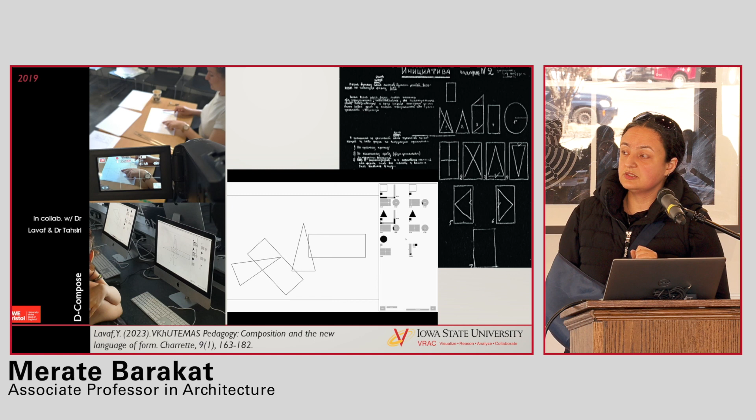Obviously, this was manual, and my colleague, Dr. Lavaf, has been running first year, which is 230 students every year, and has been doing that manually. And so we thought, what is the difference between them learning it by hand and if you run the same sort of exercise on the computer?

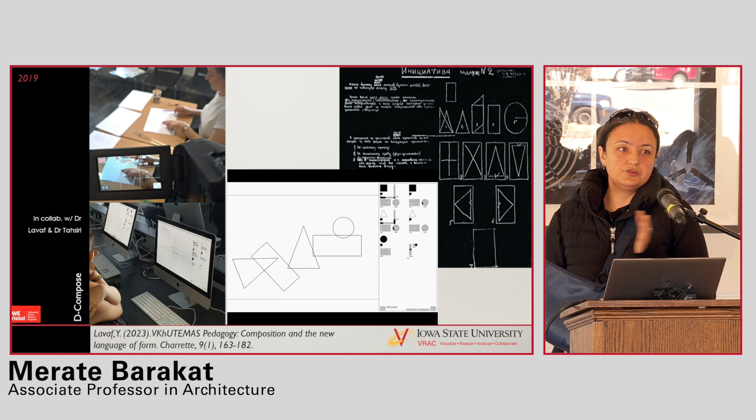And because we have all this data, we are now working on, instead of just having the students run their examples and then give it to someone to grade, how can we train a machine to actually indicate to the student, while they're doing it, that they are too far from a good composition, or getting closer, or getting some sort of feedback, essentially.

So this part, as an architect, the buildings we know are starting to get smarter, we're getting these sensors, but the idea is, how can this building have a dialogue with its users?

So my colleague who has been working with me, he's a phenomenologist, does not do any technology, but he has the sense of how do we be? How are we being in the space? How do we be as a community? How are we on our own if we're one or two people?

At the same time, I was trying to figure out how people navigate a space collectively in response to sound. So we set up an installation in a crypt in Bristol, with a simple set of sensors, and the system figures out: if you have one person, there is an ideal position. The user doesn't know that, but as they're moving, their speakers are moving from pink noise to an actual music composition.

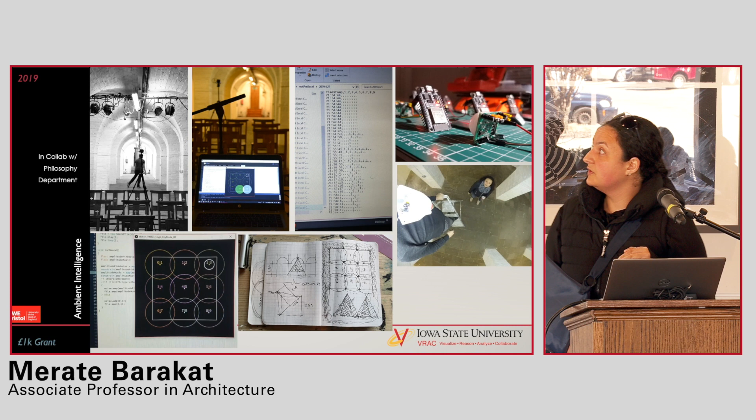If there's two people, then the system starts encouraging them to find the positions that will help them both work together. And if there's three or more, then they start navigating the space.

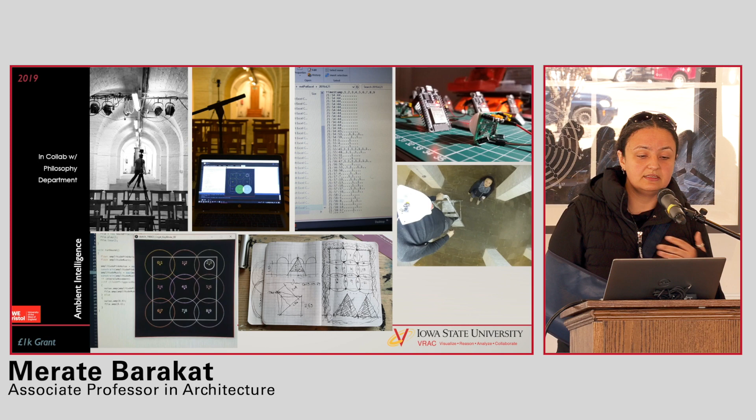So the idea was, from my perspective, I was trying to figure out how people will navigate the space. And in his example, he was trying to figure out the phenomenological response to these changing aural senses.

And so the music that we used is my colleague's friend's. He let us borrow it. After 2 days of the exhibition, it was a bit nauseating, but it's a beautiful piece.

So one of the things that we didn't realize is that if there was a group of people that knew each other, they started negotiating, but the ones that didn't know each other were not aware that there's a way of collaborating together.

The other thing, which comes from the recording but also in the experience itself, is that pink noise, or noise in general, masks voice. So it was very difficult for people to communicate because the pink noise was masking them. And as we were recording, because we were using a fancy GoPro, it was canceling out the noise, and therefore the recording is not showing the change in the music.

We then took that project to our MArch students and brought in a fabrication method. So instead of music, we were trying to figure out how to fabricate sound. Each student found a different perspective on the project.

One was looking at a phenomenological response of how you can allow or move people through space just by binaural cues, without telling them where the corridor in the space is.

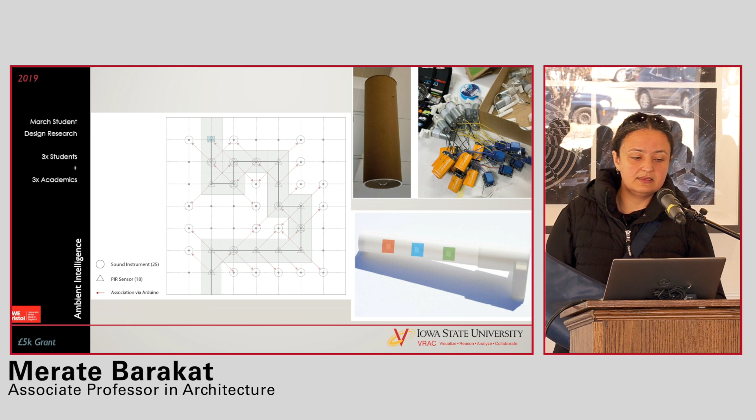The other one fabricated essentially 3 different tones that an air compressor was passing through in response to the location of the person in the space, trying to navigate them, and then trying to see how people would react to the sound. So they put chalk on the floor and encouraged people to fill their shoes with chalk and try to follow the space.

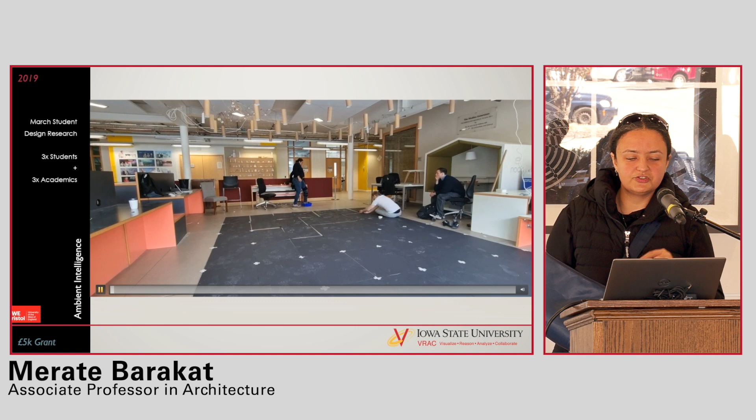So these are the simple small bits of the project. I don't know how much they are computer response, but that's how I kind of see the technologies—what does it mean? How do people comprehend the sound, the music, or even the images, and what is the quality, and what is the importance of the quality of that?

Should start wrapping up. I'm done. Okay.

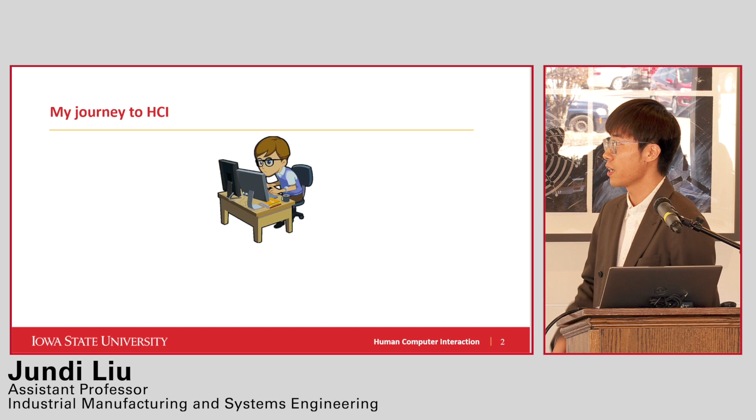I'd like to take you through my journey to HCI. Everything starts for me as an undergrad in computer science. I was coding all night long. That's how I learned and gained experience with the computer part of human-computer interaction.

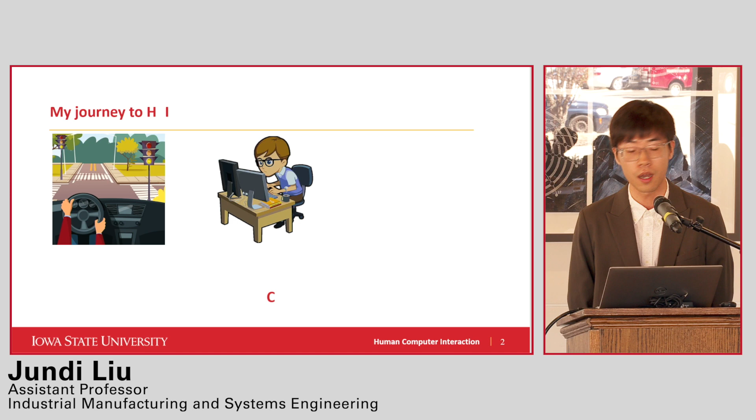Then I took a bit of a switch in grad school, entering human factors and ergonomics research in industrial engineering. Several of my projects involved naturalistic driving dataset analysis, where we analyzed human behavior, driving safety, crashes, and human errors. That's how I gained experience in the human side.

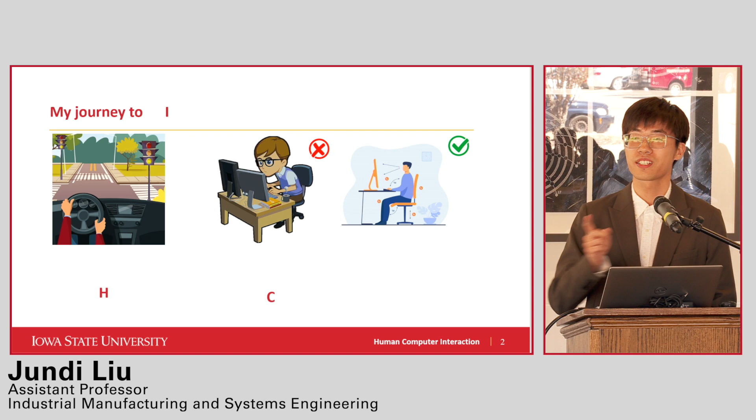One of the biggest findings of my entire research area is really good, bad posture. Correct your posture as soon as possible, okay? That's really good for your health. Okay, that's a little joke.

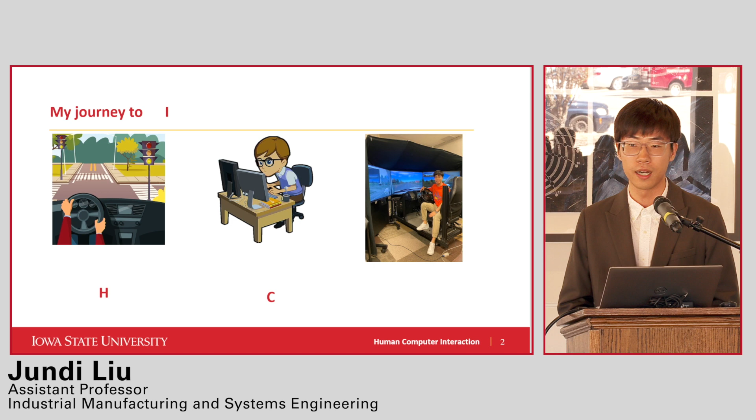For my dissertation onwards, I wanted to combine those things together—that's the interaction part. I started working on driving simulators so we can program autonomous vehicles' behavior, and also see how human drivers behave and how to connect those together.

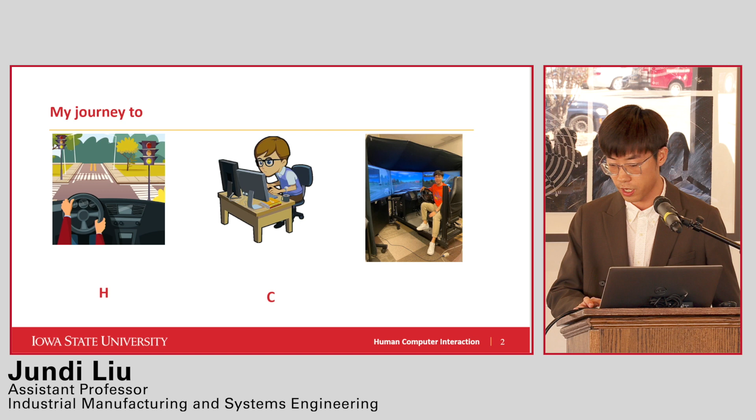All of this leads to my current lab, called the Human-Centered Interactive Autonomy Lab. Our goal is to build customized AI agents that can collaborate as trustworthy teammates with human users in safety-critical, complex decision-making tasks.

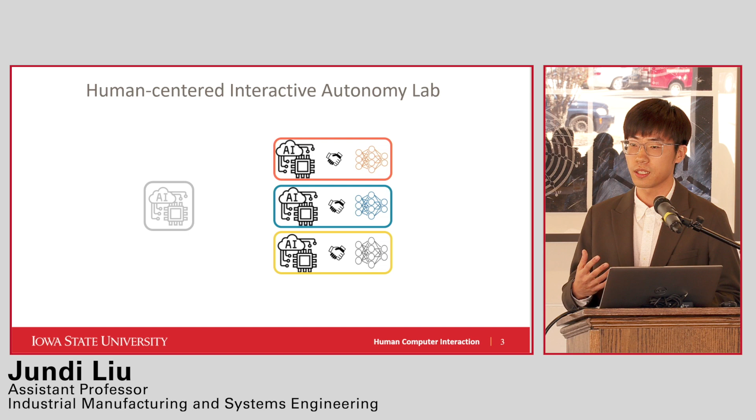Specifically, we want to build theory-driven computational human models that can collaborate with computers without intruding or interrupting during the interaction or collaboration. I'd like to break it down into three keywords in that name.

For the human-centered part, a lot of other studies treat humans as a data generator. What we want to do is build theory-driven human models. One of the human models we're looking at is the inverse reinforcement learning framework.

You interact with the environment by observing the state and doing some actions to receive a reward. In this case, you observe the expert's demonstration and learn those behaviors.

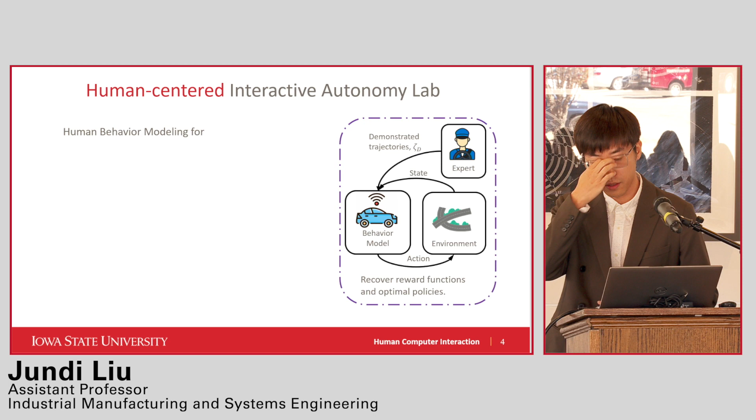We can use this human behavior modeling to build customized vehicle automation. This is one example where I learned this behavior model from naturalistic driving data and implemented it in a driving simulator with aggressive and conservative behaviors. We can also predict takeover readiness or timeliness in autonomous driving.

More recently, we started a new collaboration with the University of Nebraska Medical Center to look at how we can model older drivers' behavior with mild cognitive impairment, so we can build proactive monitoring systems for the driver and do some early intervention.

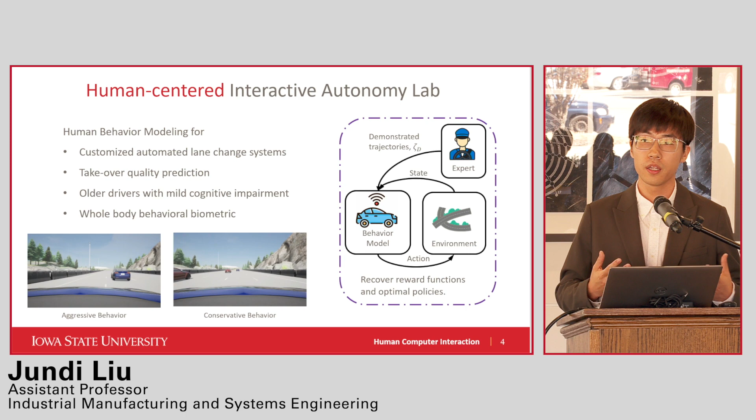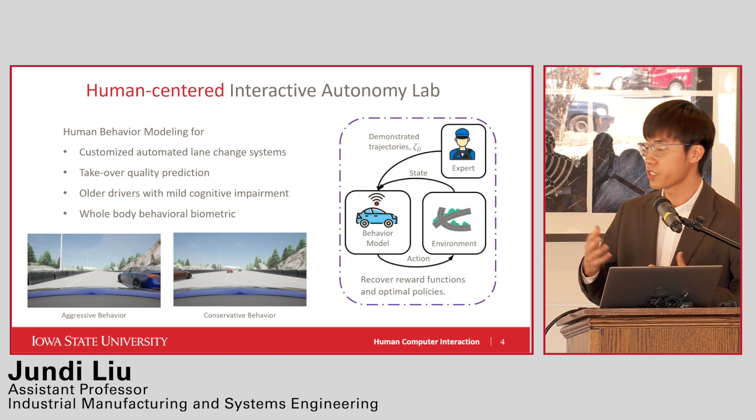Another recent project looks at whole body behavioral biometrics to see how we can improve authentication and human-computer interaction trust, as well as VR security—in the virtual reality world for human-robot interaction.

That's the behavior side, but humans have individual differences—none of us drive exactly the same. Mathematically, you should stay in the middle of the lane, but nobody drives exactly in the middle of the lane. So why does that happen?

Because we have different cognition—that's also the human factors side of thinking. We need human mental models. I'm specifically interested in human trust toward algorithms, robots, or systems.

We build driving simulator studies with different conditions, for example different transparency—overlaying information on the windshield to help drivers gain better situational awareness. Then we can induce different dynamics in their trust levels.

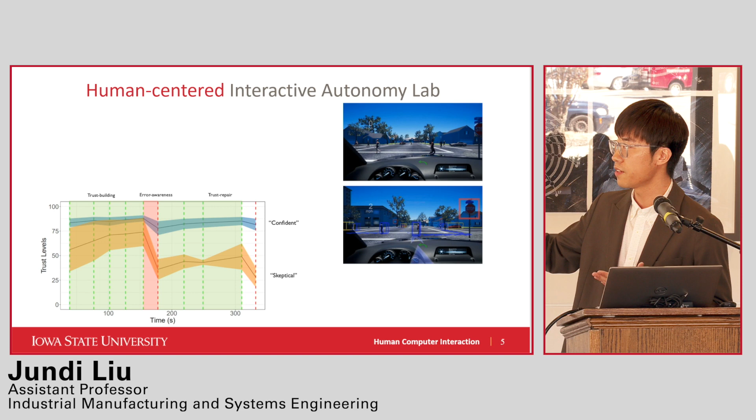We use machine learning algorithms to cluster different people based on their trust toward automation. Somebody in that blue group is pretty confident about autonomous vehicles—they tend to have a high trust level and stay stable even in faulty operations. But some other people are more skeptical.

In this case, we also want to build non-traditional machine learning algorithms—more theoretical-driven models. We use a state space model so you can model the current trust level depending on the previous timestamp's trust level, and also observe some system input.

Those are just hidden cognitive states. What you can only observe from the system in that model is human behavior—either their takeover intent or their driving behavior.

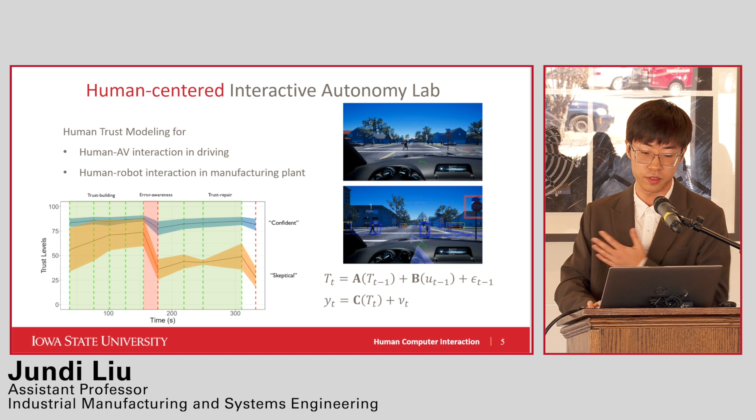So they can be used in our human autonomous vehicles interaction, and we recently explored human-robot interaction in the manufacturing plant. Okay, move to the next keyword: interactive.

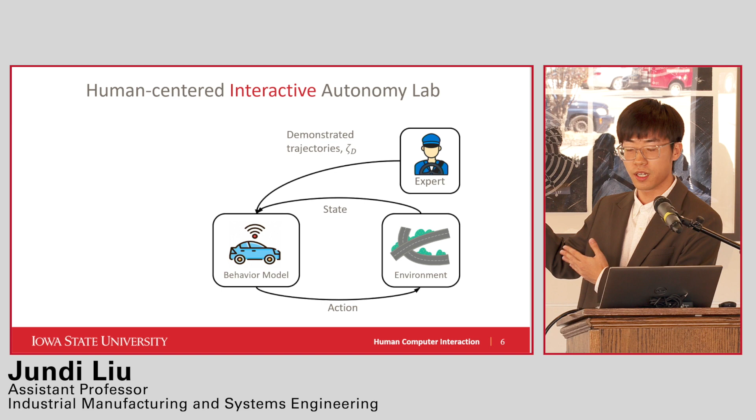For the interaction part, we have the theory-driven human-in-the-loop reinforcement learning algorithm we're trying to build and keep refining, starting from this human behavior model. We try to integrate human trust models into this framework so that when you make decisions, you're not only following the single mathematically optimal solution, like staying in the middle of the lane. You can have some suboptimal actions based on your trust. Okay, that's what this flowchart is saying.

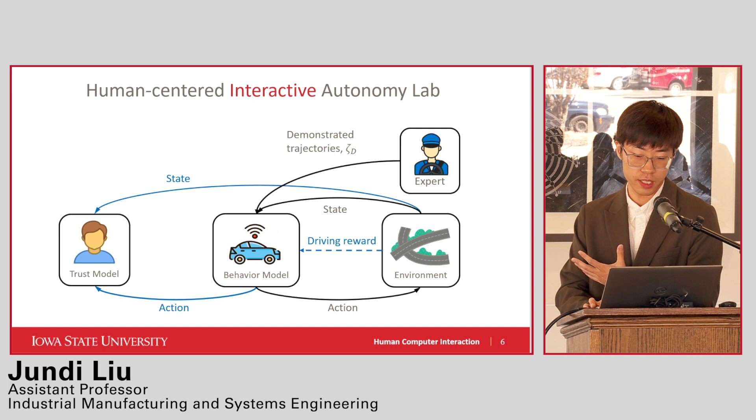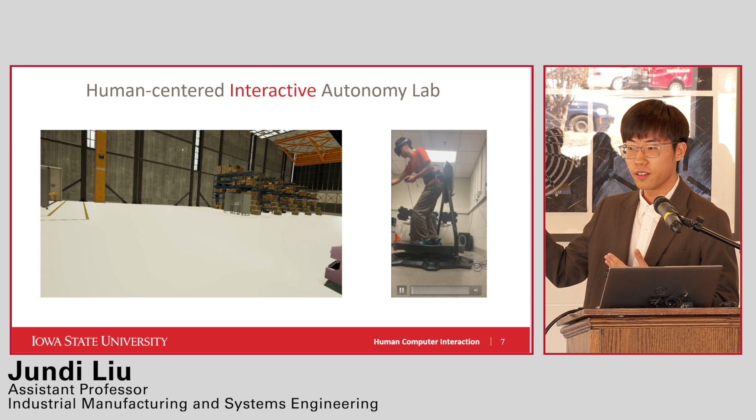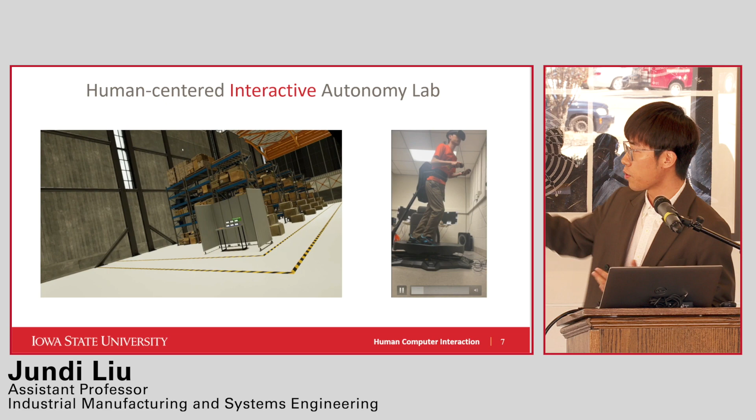And then we have some interactive test beds. We're trying to collect data and validate our methods. On the left here, we have a simulated manufacturing environment in a VR setting. We also have a very cool pedestrian simulator that you can walk in. Instead of teleportation in the VR world, you can actually walk and pick up stuff like in here. So this is our environment, and we have some design tasks for them to do.

And we also have a driving simulator, which is a multiplayer platform that will connect the pedestrian simulator with the driving simulator. So you will have this two-angle view, and then you can view each other's behavior. And yeah, we can do studies for vulnerable road users.

Okay, last one: autonomy. So our lab does research on autonomous cars, automated guided vehicles, and more recently, we started to look at humanoid robots and quadrupeds, like robotic dogs, and how they interact with humans.

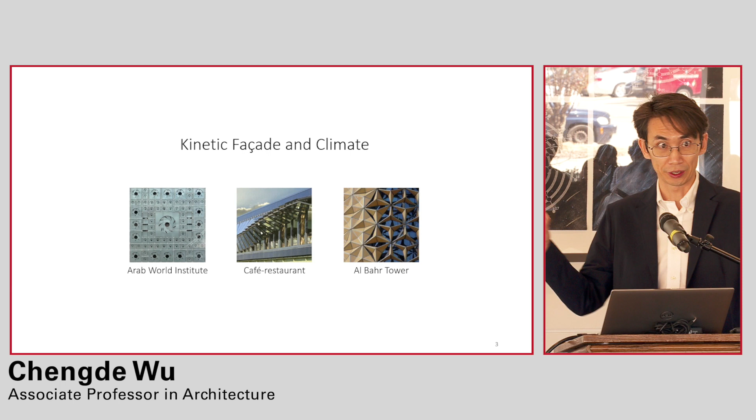One is kinetic facade, the other is micro-LED facade, and 3D printing that's right outside of the communications building. The first one is kinetic facade. Mostly our buildings are static, though there are a couple of buildings—sporadic examples around the world—that move. I was interested in how kinetic facade affects energy consumption and human visual comfort in terms of daylight and things like that, depending on which climate you are in, because depending on where you are, the solar angles are all different.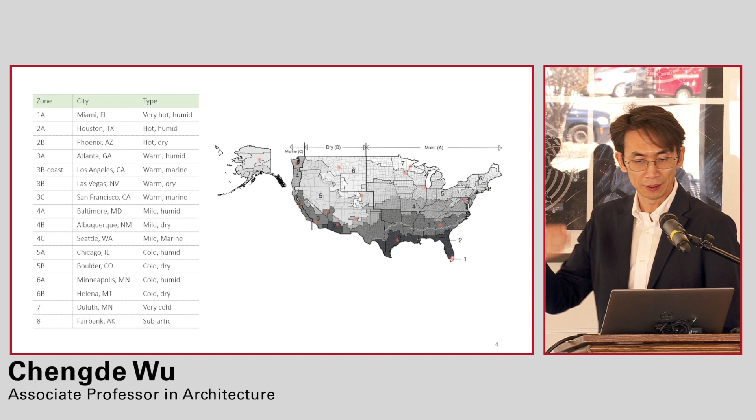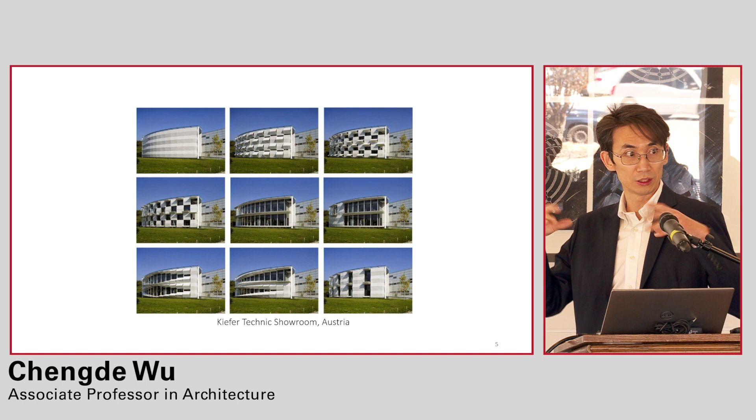So I selected 16 sites in the United States across different regions and ran about 3,360 simulations and tried to present the result of it. This is one example, which is a Kiefer Technic showroom in Austria. During the day, the facade moves according to the climate elements, and at night, it acts as an installation art piece, so it can be interactive with the people.

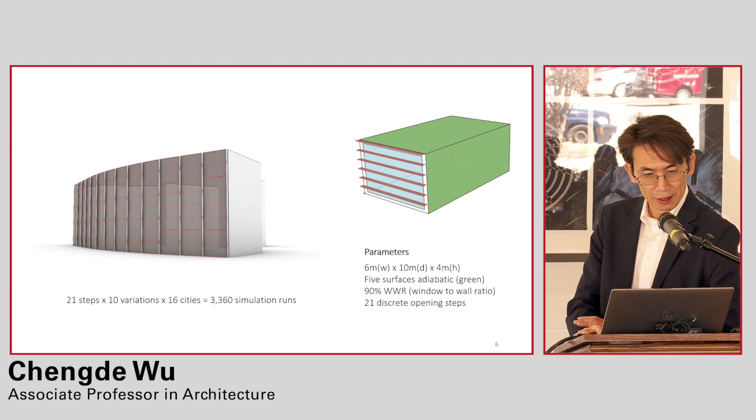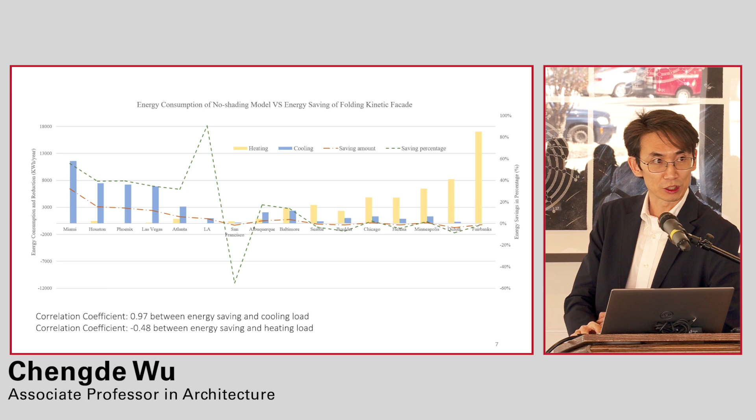Here is a model built in Rhino, a 3D modeling, digital modeling environment, trying to simulate what is the best angle to preserve energy and things like that. So after about 3,360 simulations, I got the result, which is not such an interesting bar chart, but the results are: typically it works better for hot climates. That is part of the result.

And there are some surprises, even boring numbers, but in the result I found some erratic findings that were not what I expected.

So the next step I went to was looking at different ways of kinetic facade—you can have folding, sliding, turning, all that stuff—and how that would affect broader regions. I picked 2,500 cities globally to map it more densely and ran about 1 million simulations last summer. It took 2 months of my computer running 24/7, and I got about tens of gigabytes of data waiting for me to process right now. So that's where it is.

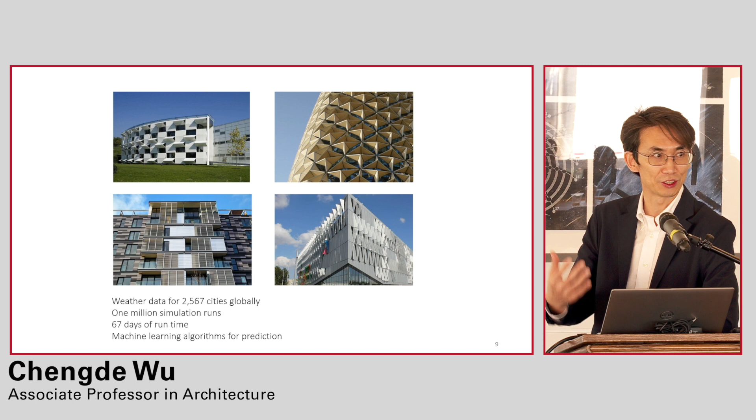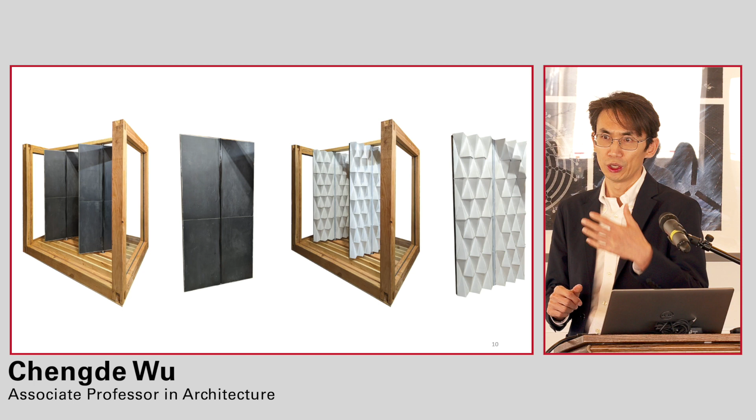On the other hand, I'm working with a couple of undergrad students and two grad students on building the actual physical prototype, trying to use microcontroller sensors to control that and see how it works. At some point, we'll try to test how that affects the energy and also the visual comfort of people staying in the room. So that's mostly where the progress is on this project.

At some point, all the sensor data can be connected to the cloud, and then people can use their phone to access the cloud platform and report their comfort level, and the facade can react to what the people inside the room are thinking.

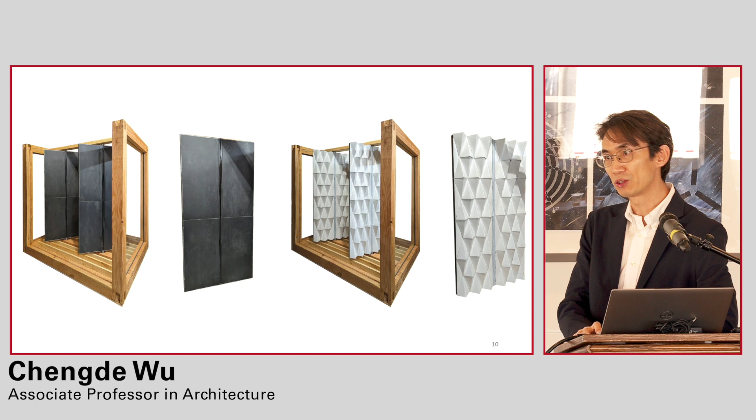And depending on how many people are inside the room, the temperature could change, and carbon dioxide level could change. You might need more ventilation. All that stuff, the system will respond to the user's comfort.

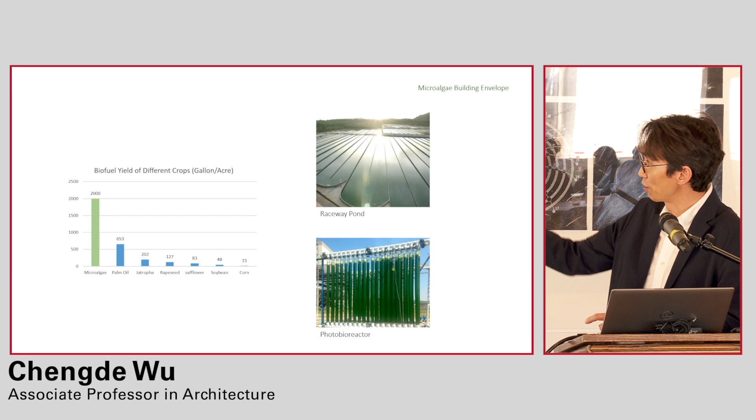Next project is about a micro-algae building. This is unique in the sense that we try to apply renewable energy on building facades. We do a lot of solar, wind, and geothermal in buildings, and there are a lot of examples of that, but biofuel for buildings is not very common. One common way we grow microalgae is in an open pond or in closed photobioreactors, and we're thinking how to use those kinds of photobioreactors on buildings to generate on-site renewable energy.

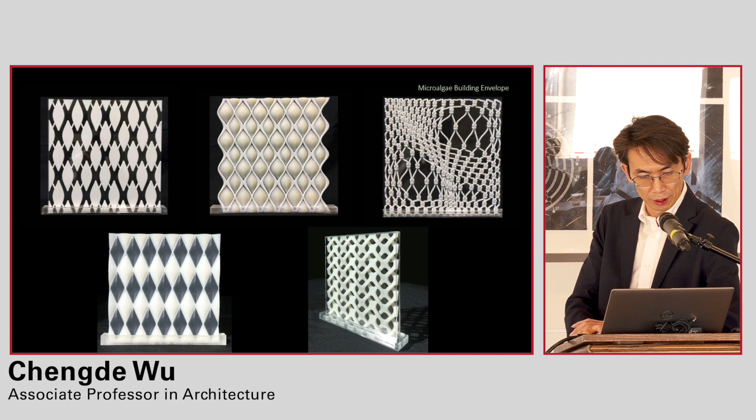We started small, like a foot-by-foot mock-up, just using 3D printing, just to see how they look in terms of different design prototypes. And we started to imagine what this could look like in a real building, how the system would work.

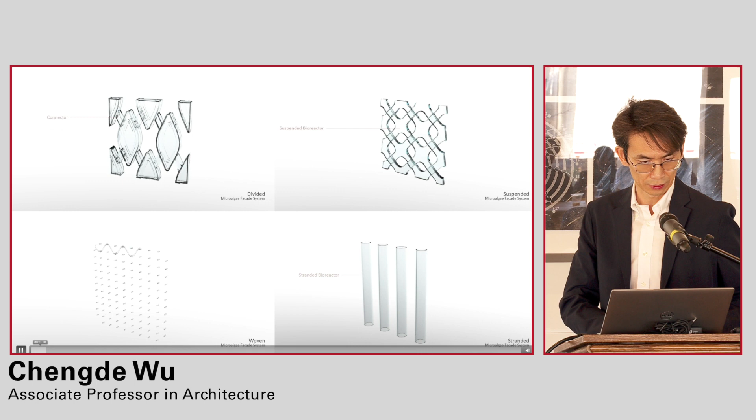I'll just quickly go through that. Can I drag it? Looks like it doesn't like dragging. It takes about a minute, I'm going to skip that.

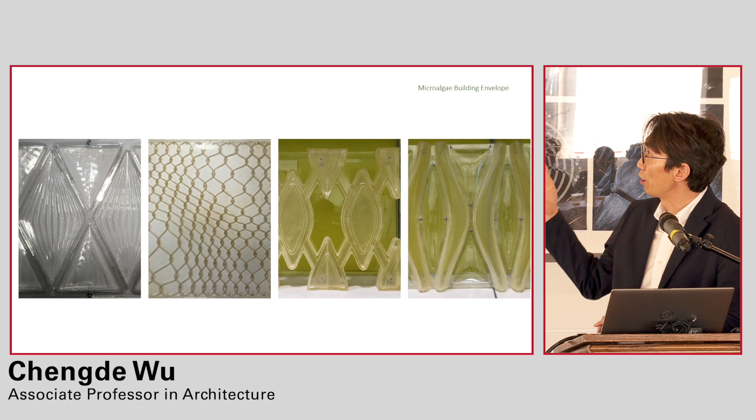Later we built a slightly larger 2x2 feet mock-up. It's a little bit functioning, so it's empty inside, so we can hold the microalgae and water inside. One of these is a smaller tubular algae setup, with algae living inside tubes with water and nutrients, and carbon dioxide feeding into that. From the top it outputs oxygen through photosynthesis, and on top a computer is monitoring the carbon dioxide and oxygen levels.

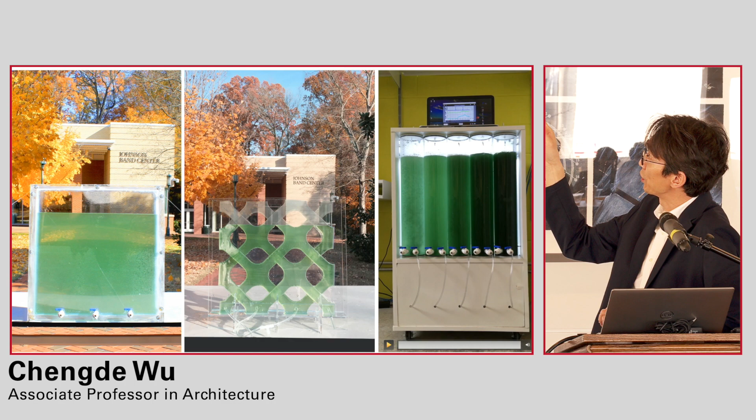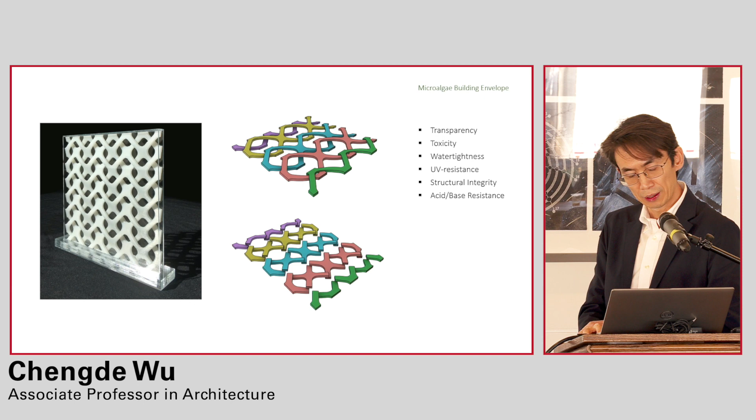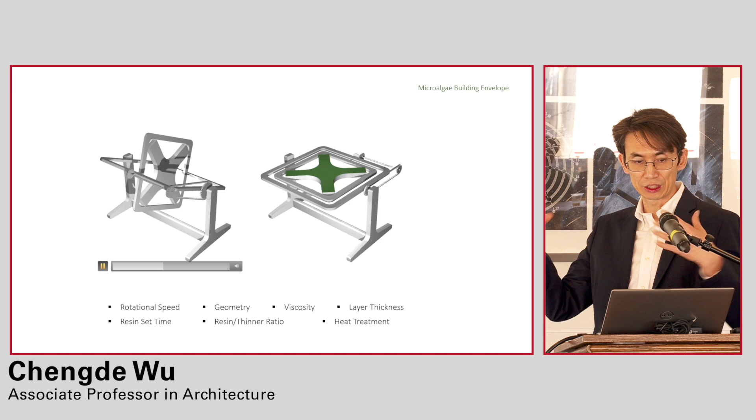Later we decided to go with dual-axis roto casting, which means the egg shape is one of the small modules, and it's empty inside. We put liquid resin in it, and as it turns, it coats the interior surface to make a hollow shell. Typical things like plastic kayaks are made with this roto-casting technique.

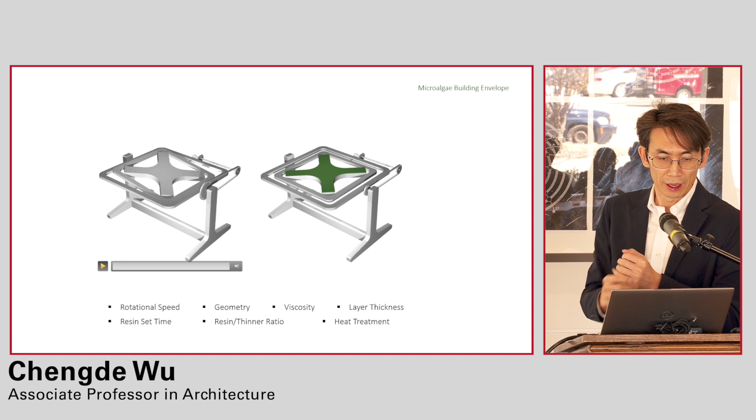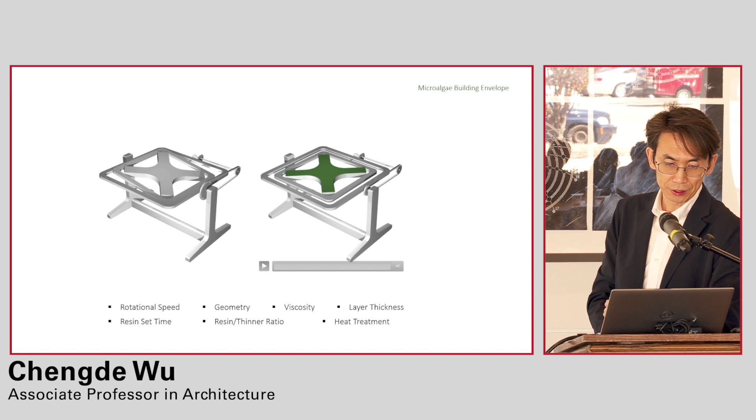What we learned is that you have two gears controlling two different axes, and depending on the gear ratio, sometimes you coat it very badly, sometimes much better. This is a 1-to-1 ratio, and you'll notice the top surface never faces down, so you never get a complete shell. So we developed a mathematical model to see how to coat it more efficiently and find the best gear ratio.

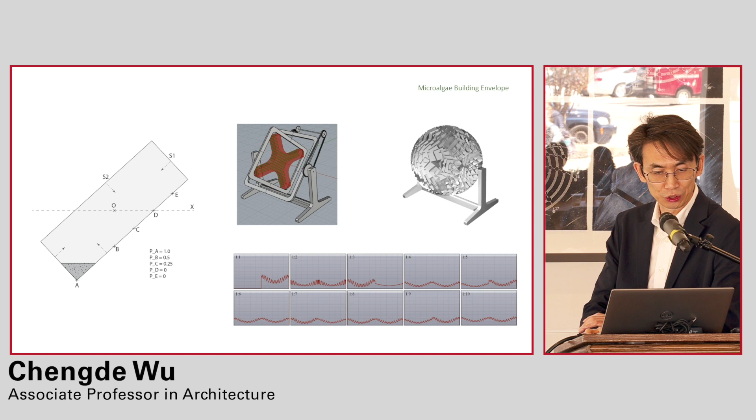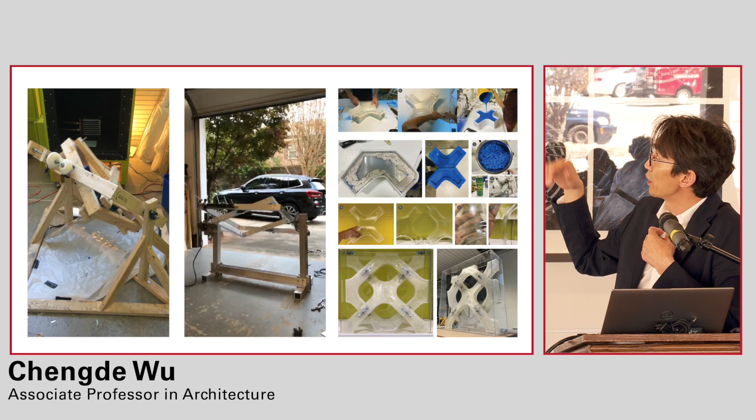We found the right ratio and tried to build that. This is the planning of how to do it. Later we built one with wood, so what you see inside at the middle is a mold. We also built another with aluminum. This side of the image shows how we start to 3D print the shape, then make a mold, then cast it, and you end up with the bioreactors.

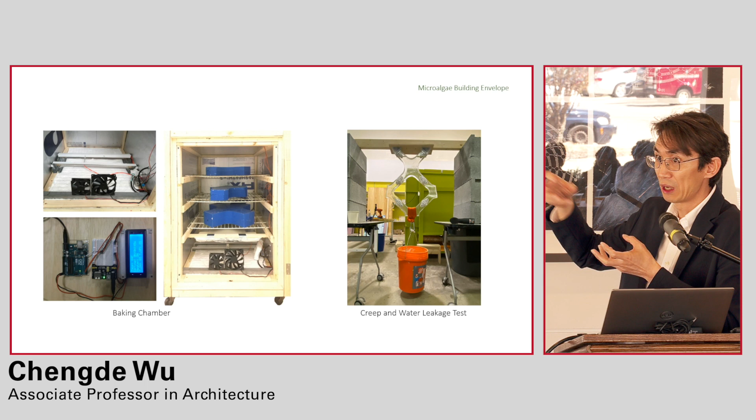We built some custom chambers with Arduino to control the fans and heat and all that stuff to cure the resin, doing some cheap testing of how the material creeps or not, since it's a resin polymer type material. We also did structural testing, like pull tests and things like that.

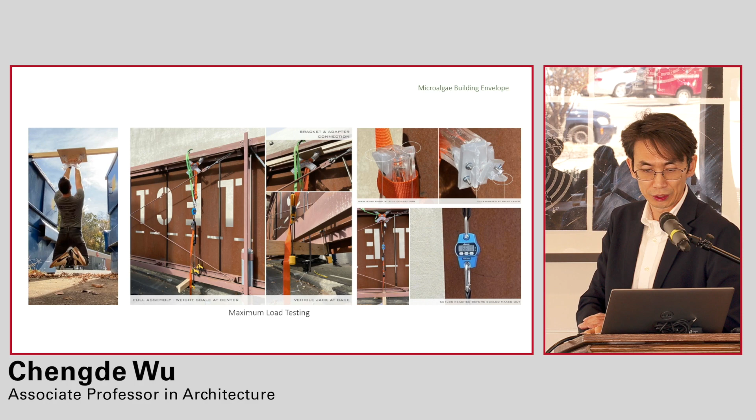At the end you see a big structure, with a car jack at the bottom pulling the assembly at the top to see how much force the joint can withstand, and at the middle there's a scale to measure that. The 3D printed joint failed. The first one failed at about 400 pounds, and the second one endured 600 pounds, which is the maximum of that scale, using just a typical 3D polymer printer.

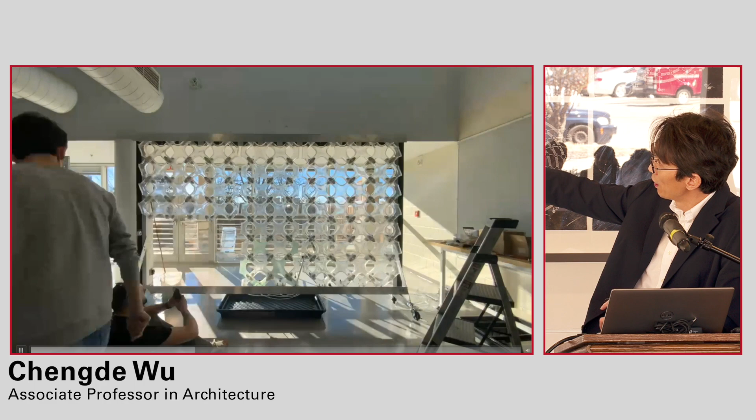This is the assembly of that, and here's me and my buddy filling it up with some water to see if it's watertight or not. At the center there's some algae filling in, and this one received an award from Architect Magazine in 2021.

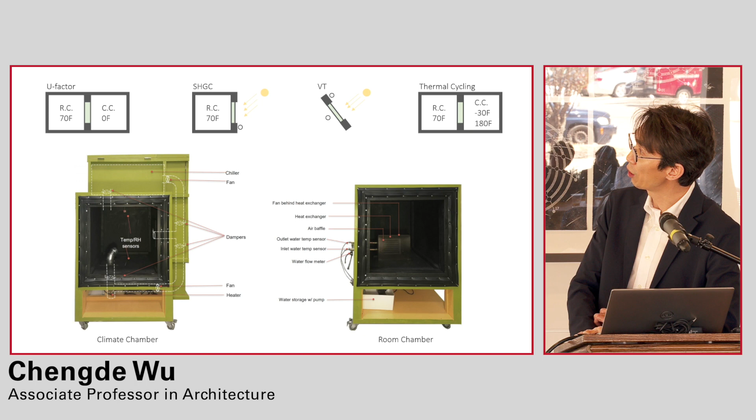We started to test how it functions in reality. We built two chambers, one side mimicking the climate, the other side mimicking the room, and we put the facade at the center to test how well it performs.

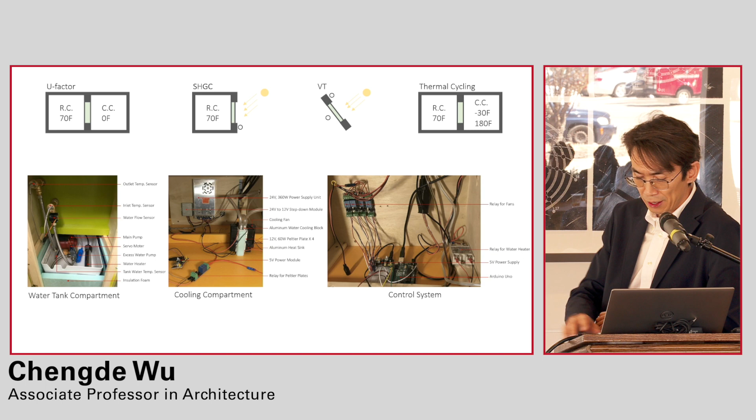And we test the U factor, which is the thermal performance, and then heat performance and visible light performance. We made some mechanisms and electronics to control the two chambers.

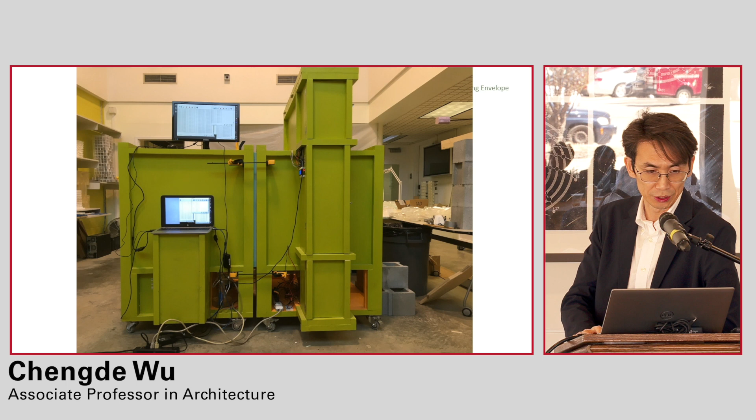And we built a VR model and tried to test how people react to this type of building facade. But it was right before COVID, and then all of the human subject testing was put on hold. So that didn't actually take off.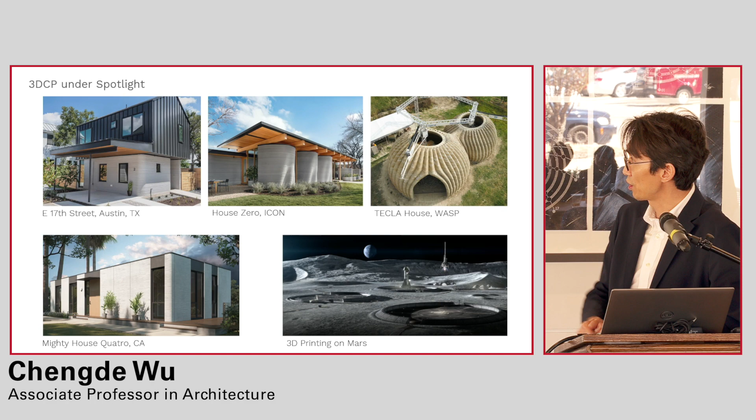The last project I'll try to briefly go through is 3D concrete printing. This is a new technology going on. There are a couple of examples around the world, and someone's also imagining putting that onto Mars. Not sure how reasonable that is.

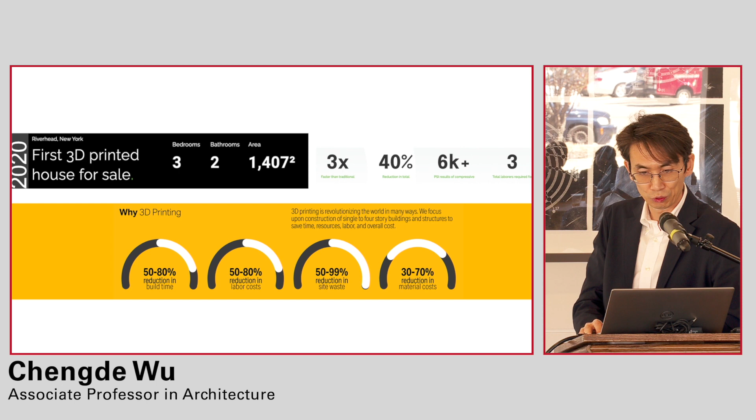And people claim that this can reduce labor force and material, 50%, 80%. We found so far that's not true, unfortunately.

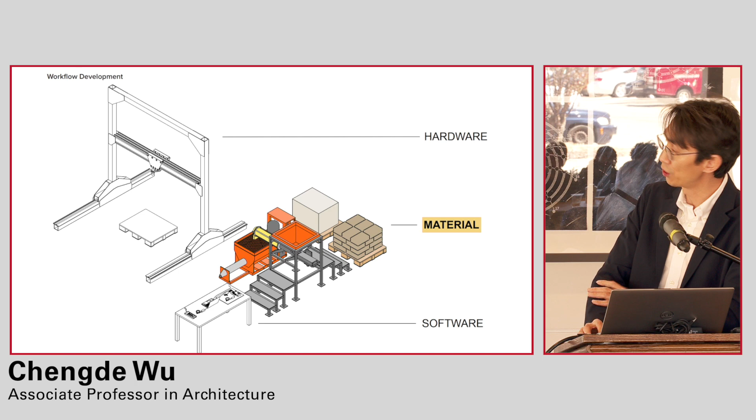We have a setting at the CCL building right across the street. It's about this: you have a mixer, pump, and 3D printer all together. And at that corner, that's what we have, about 12 feet by 12 feet by 12 feet.

And on that side, we have a larger one. This is a printer that's erected. We're working - I'm working with another HCI professor, Pete Evans. Pete Evans is working on this printer mostly.

This is moving right now, and if you go by the CCL, you'll see a small concrete building like this. That's what we printed with a smaller robot that's about 6 feet tall, and this arm - you can see the arm is moving to try to print.

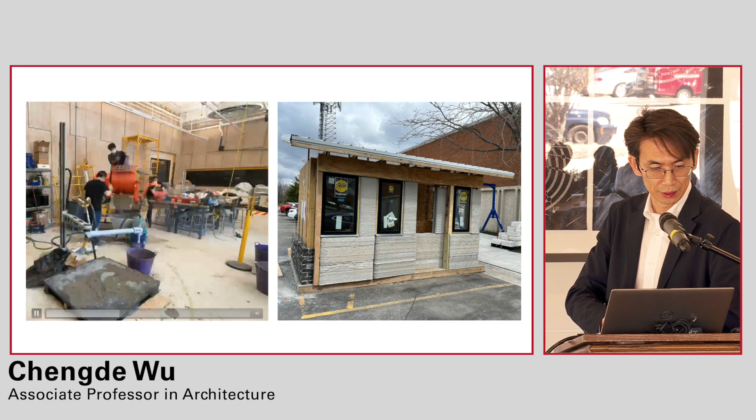That's how that layer by layer is moving up, right? And we stack up the layers to build the building.

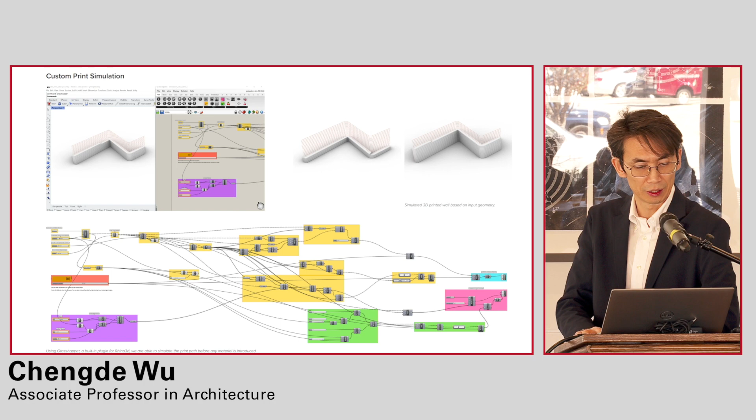So in this project, we had hardware challenges, also software challenges, because it's not uniform. It's not the same as the plastic printer software. So we have to make custom software for the slicer and things like that.

Also other challenges like material, because the 3D printing cannot put rebar in it, so typically it gets a lot more cracks easily. So we try to see if we put fibers in, how well it can stand.